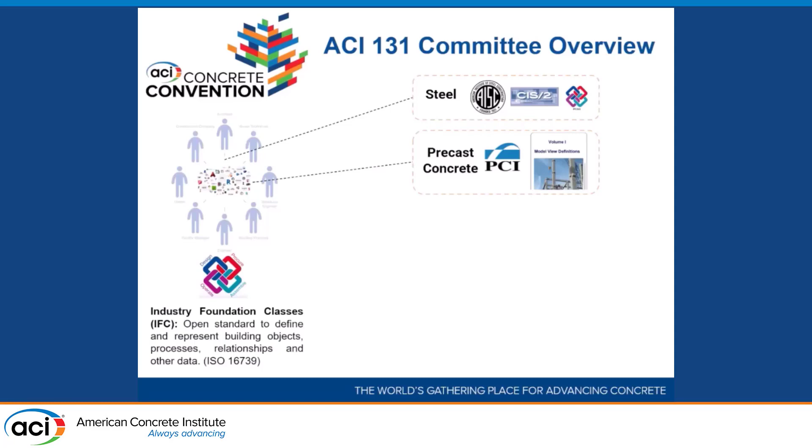The PCI already developed them, with help from Georgia Tech and the Charles Pankow Foundation. But if you think about precast, it's also parts that you put together and then join, right? So it's already broken into pieces.

The problem with concrete is first the supply chain. It's a little bit more interesting because you not only have the typical stakeholders, then you talk about concrete, you talk about rebar, concrete, finish, temporary structures, formwork, scaffolding. So how do you coordinate all these people? How do you make all these people talk?

And more challenging than that is the monolithic versus object-oriented nature of the model. If you think about steel, if you think about precast, a beam is a beam, a column is a column, and there are parts that you put together.

In concrete, cast-in-place concrete, there are several views that you have. The physical model, which you would call a frame, but then the detailer finishes an object here and starts the next there. But the structural engineer says, no, actually there's no boundary, it's just a node. And then the contractor says, no, but I built it this way, so I split it here and I split it here. So now you have different people looking at the same building differently, and they've got to be consistent. So cast-in-place is inherently a little bit more challenging than the other materials.

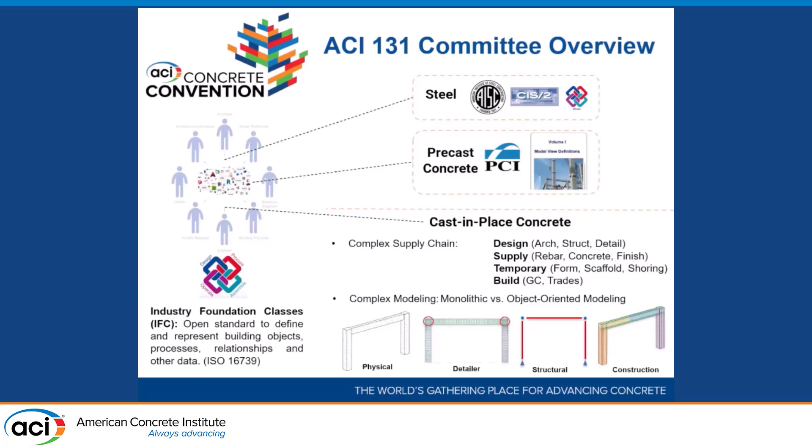For BIM purposes, for modeling purposes. So going back a little bit to that IFC side, IFC is a standard readily available. You can export it, you can import it in the tools you have. The problem is IFC is pretty flexible, and that's an advantage and a challenge. Because if I tell you apple and you don't know what an apple is, you don't know how to process that. So I can tell you beam, and a beam has top and bottom reinforcement, but the program, unless it understands that I'm saying number 3 at 20, if you're not capable of reading that, it's a challenge. So you need to standardize that.

So the National BIM Standard proposed a path to try to further define what needs to be defined when you are looking at a specific industry. So the typical path is, first you look at the whole industry and you say, okay, how many people do you have? What do they do? What tasks do they perform? And how do they exchange data? What model goes to whom? From the architect to the structural to the detailer, and so on.

Once you have that, you take every exchange and say, okay, what do you need from me? What do I need to give you? This is the data that we need, and this is the way we're going to express it. This is what I mean when I say top, middle, and bottom bar in a beam. This is what I mean when I say this, when I say that. So that's a specific view of the model that we are exchanging. That's called a model view definition. And finally, we test it, we model it, we validate it. So that's what we have done, a little bit of what we are doing, and what we're testing. So we're kind of following this general guideline. So that's what the committee does. That's our goal. That's what we're after.

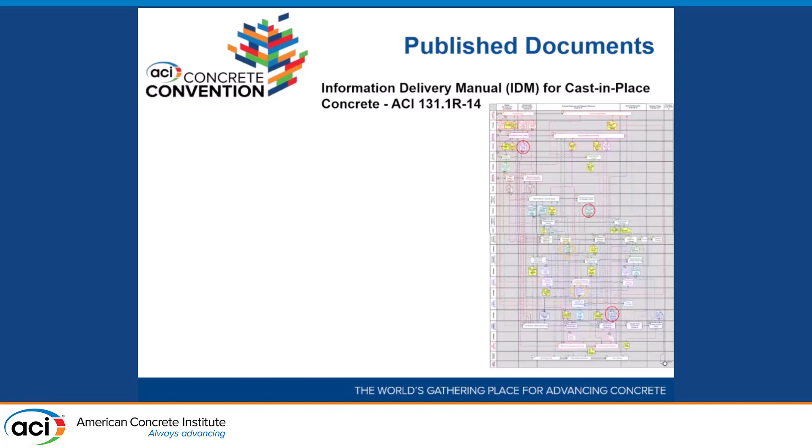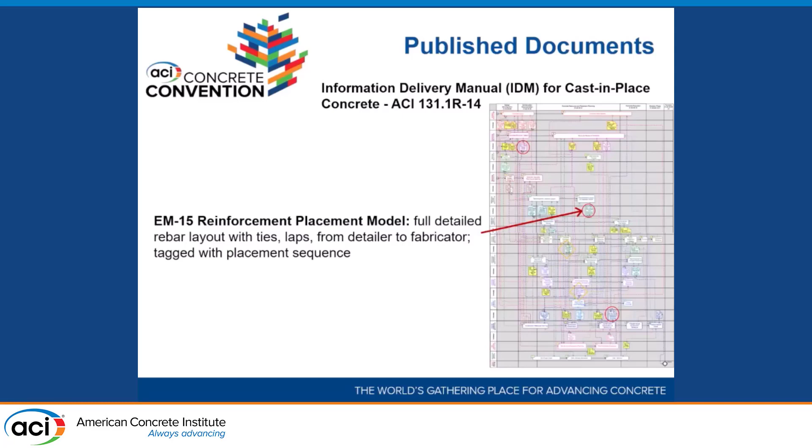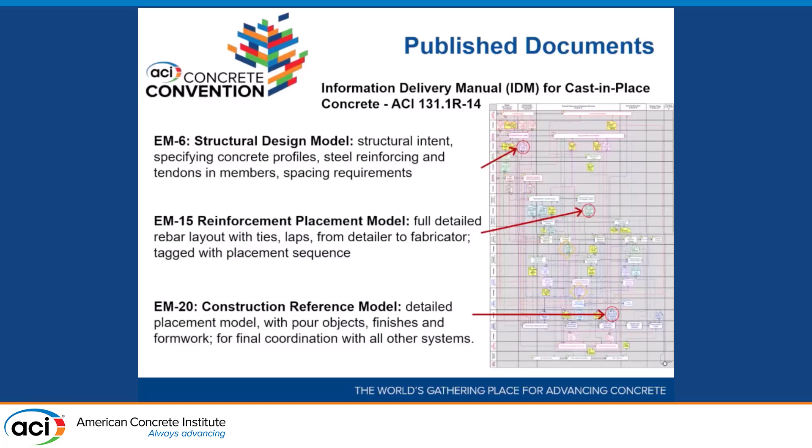Now, the first exchange, and this is already a published document, I'll talk about it in a minute, is the reinforcement placement model. So this is the actual detailed rebar. How do you export it? What properties do you export? What do you mean by the properties? So you can actually find it in a couple modeling tools to be able to export this exchange. And it was very important because rebar is kind of an important component of concrete. The other 2 exchanges, these are the ongoing developments, are the structural design model, which is the design intent from the structural engineer to the detailer or the contractor, and the construction reference model, which comes from the general contractor to the engineer, to the coordination, to the trade. So that's what we are working on.

The next document that we published is that EM15, which is called ACI 131.2R, in 2017, which is the first BIM data exchange for the concrete industry. So we have the IDM, and then we took the first one, and that's published, and it deals with rebar. So if you look into the document, you'll see bar information about mark, size, geometry, surface, bar. So all the data that you might need to describe and specify rebar in a 3D model. So this provides you a standard way of communicating it. So if you follow the standard on export and follow it on import, everyone's going to be able to read the data effectively.

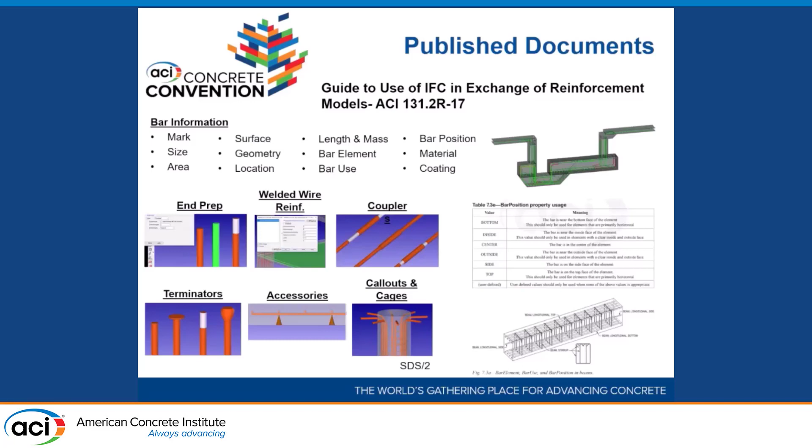And beyond the bar, it deals with end preparations, welded wire reinforcement, couplers, terminators, accessories, callouts, pretty much everything there. So if you go to the document, you will see some images and you'll see all these specifications on agreeing on what we mean when we say something about the rebar. So that's the first one that we have published, the first actual exchange along with the IDM.

And finally, there's a recent tech note that tries to help us agree on what we mean by the level of development, meaning how detailed a model is when we talk about the model itself. It typically goes from 100 to 500 when you're designing, and then operations go beyond. But if I say LOD 400 for concrete, what do I mean for the concrete, for the rebar, for the formwork, for everything around? So that's the third document that is published, trying to make us agree on the language as well.

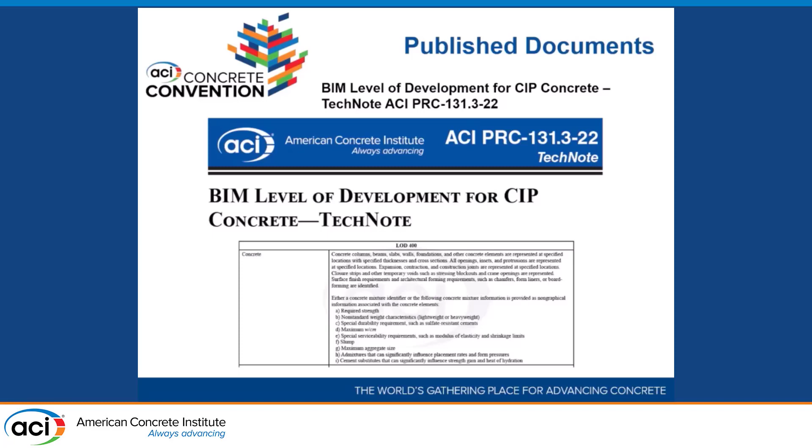So now that that's done, we have 2 more exchanges that we're actively working on, and one update to the EM15, the rebar. So for the rebar exchange, we've been working with the PTI, the Post-Tensioning Institute, to add the post-tensioning reinforcement to the exchange. The exchange didn't account for that when it was published. So we've been working on it.

It's actually been, I think, fully validated for now. So it should be ready for discussion and publication soon to account for this very important component of concrete structures as well. So more properties on or agreements on that specification.

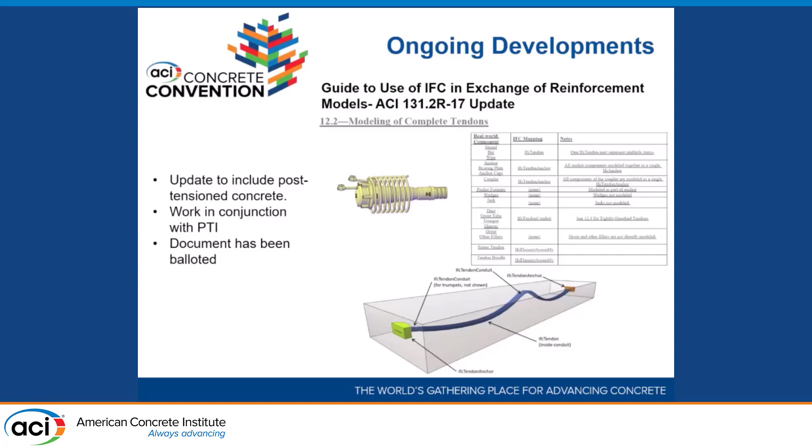The 2 other ones, and I'm going to spend a little bit more time on these ones. The first one is the structural design. So the design intent coming from the structural engineer to the detailer to everyone around. So it deals with the main concrete elements, but this is typically what you would see on structural drawings or structural plans. Details, schedules, trying to specify the rebar sections, where bars are, what you would see coming out of an engineering office to the detailer or to the contractor, right?

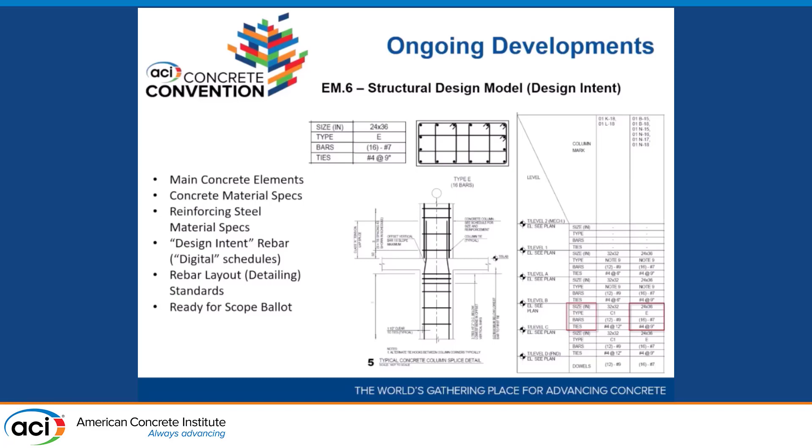The thing is, if you think about it, most firms right now would model in Revit, export it to 2D, send it to the detailer. Best case, you also export a spreadsheet, and then they have to re-import it and work from scratch. So why don't we just attach this in a standard way that we all agree on to our model and bring it along, right? So that's what this exchange is about, taking all the main elements, beams, columns, walls, slabs, and defining what is the typical data that we transfer on the schedule, that we communicate.

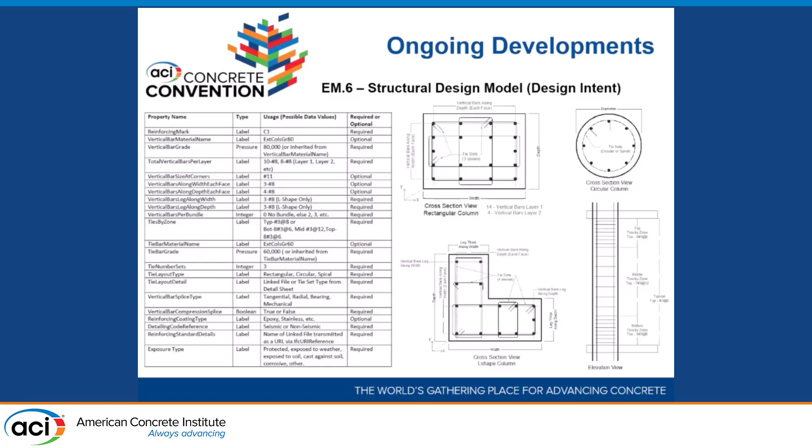Typical, I mean it's concrete. You're always going to find an exception. But on what we can most agree on, how do you communicate that? So what do we mean by tie by zone, spacing, and how do we write it? How do we specify it so I can export it and import it, and look at further applications, and I'll show you a little bit about the implementation side. So that's the first one that we're working on, getting input from structural engineers, from detailers, from contractors, trying to get a lot of agreement on this.

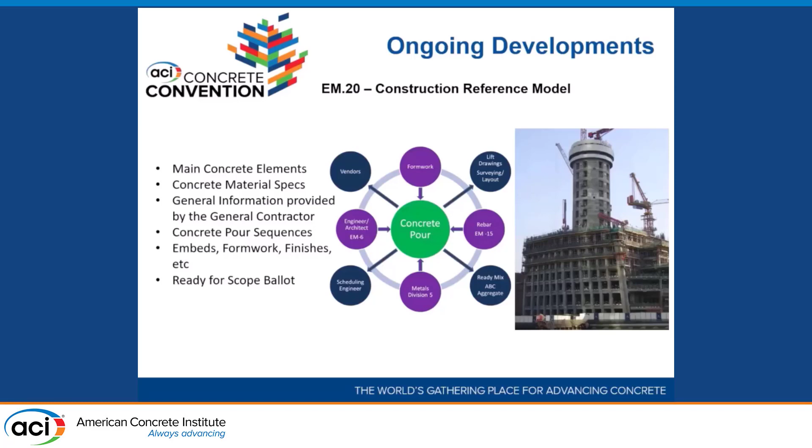The second one is the construction reference model, which comes out of the general contractor with information about the material and the sequencing and planning. So it has formwork, it has embeds, finishes, and you're able to coordinate and deal a little bit with it. So once again, what information do you need for pours, for scheduling?

Challenging in this exchange is the fact that you need to group elements. You're not thinking about one beam, one column. You typically do pours, and those pours group objects. So how do you deal with either a part of an object or a group of objects that you're going to pour together? So that's what we've been working on.

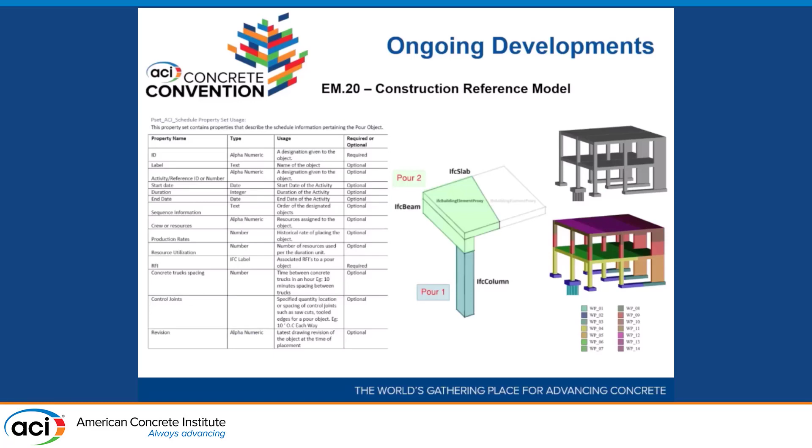Both documents, the EM6 and the EM20, are ready for scope balloting. So we have sort of an agreement on what we're trying to achieve here, and then we're going to start revising the properties and the way we specify this to be able to bring it into publishable documents that hopefully you can use in practice soon. So that's basically a little bit of the work of the committee, what we have done, what we are doing in terms of the BIM standards and the ongoing developments coming out of the ACI.

Now, the additional support that we try to provide from an academic standpoint is how does this affect our practice, and how do we help implement it to show how you can be using this? So it started with an ethnographic study with a method of applied ethnography. We just took a design company and we sort of shadowed a project, a big hospital near Atlanta in Georgia, and then we took a bunch of observations, field observations, interviews, and more importantly, process and exchange observations.

So this is a company that already had BIM processes in place, but without the standards. So how is the data being communicated, being transferred? What is proprietary? What did you have to develop to be able to let these things talk? Because not all companies have the infrastructure to build these exchanges in a proprietary manner.

And from this, we did some coding on the data that we were gathering in terms of all these dimensions for two reasons. First, to be able to map the workflows, and second, to be able to understand the value that it could be providing to the practice, the way it worked.

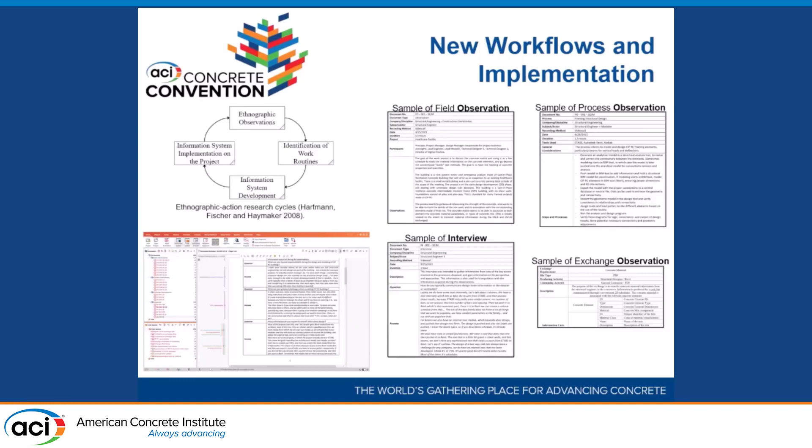So in terms of the workflows, focusing a little bit in the interest of time on these two exchanges, the design intent, we were able to map it, and even within a BIM environment, it can get complicated in terms of moving here. You can start it on the structural realm on the BIM tool, or you can start it on the analysis tool, and then you move it across the different tools that you have.

But then you still gotta export it, define a way to export it to your column design tool, to your beam design tool. If you have a slab or wall design that is probably developed in the office itself, and then you bring it back, and then you bring the data, and then you coordinate it. So even within a BIM environment, it can get a little bit challenging. It's better than 2D, of course, but it still gets a little challenging.

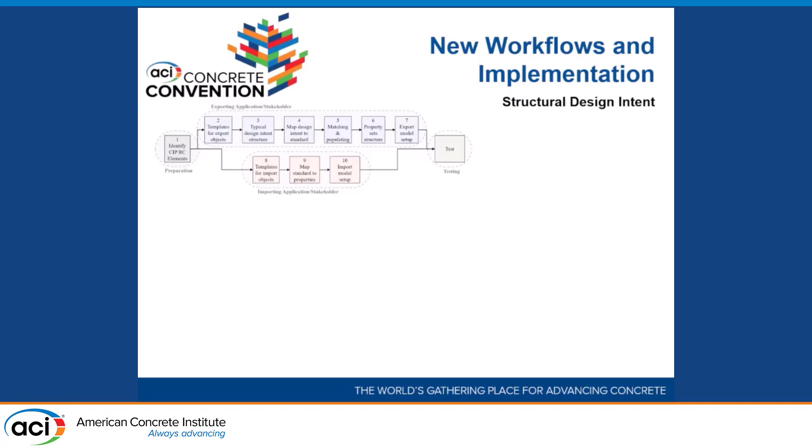So when you bring standards, the process becomes something like this. It doesn't matter anymore who's exporting and who's importing, because it's a standard. All the tools are going to understand what you mean when you export and when you import, because it's written in these standards. So we know what a column is, what the top reinforcement is, what the ties are, how to represent what you would typically do on a schedule. And once you get to that, then how do you implement it?

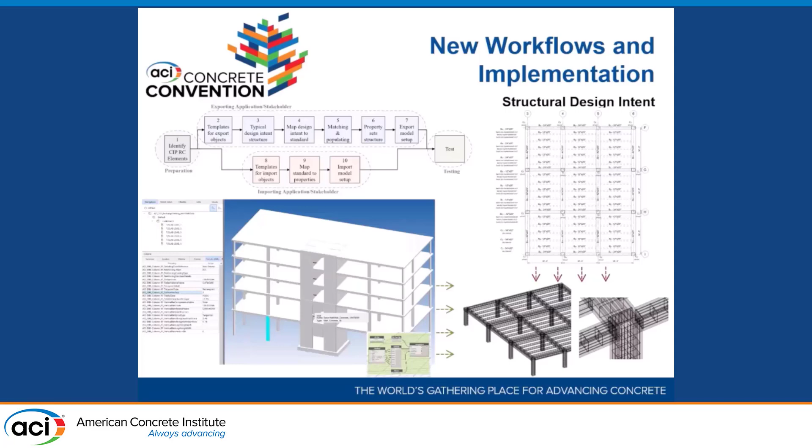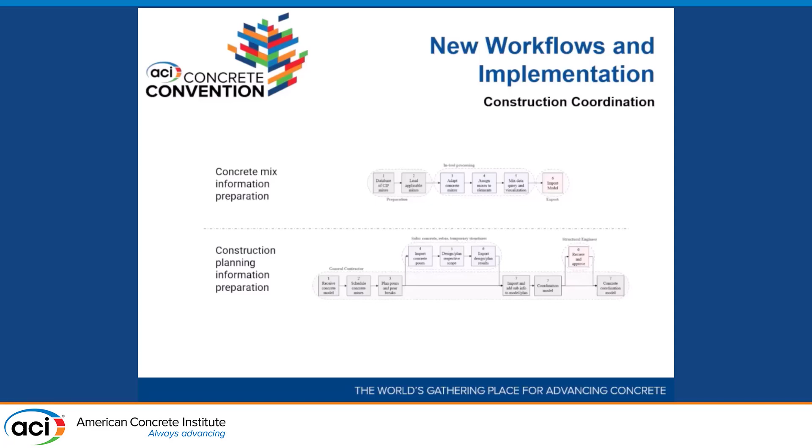The other one is the construction coordination. Same, we're mapping the process, the way it was working, the way they were interacting to coordinate this. And once you bring the standards, or you standardize the way you communicate data, it gets far simpler, because it's tool agnostic and it's process agnostic, because you agree on the task that you're trying to achieve and the language that you're using to deal with this exchange.

So, similar approach: we embedded the properties, we developed codes to populate them. In this one, we had an additional challenge, which was, as I mentioned, dealing with the geometry, parts of geometry, representing it to be able to coordinate and visualize it. So that's why we have two different implementation strategies here. But at the end of the day, you can automate all this. It's just a matter of developing the automation necessary to do the translation, and then you're good.

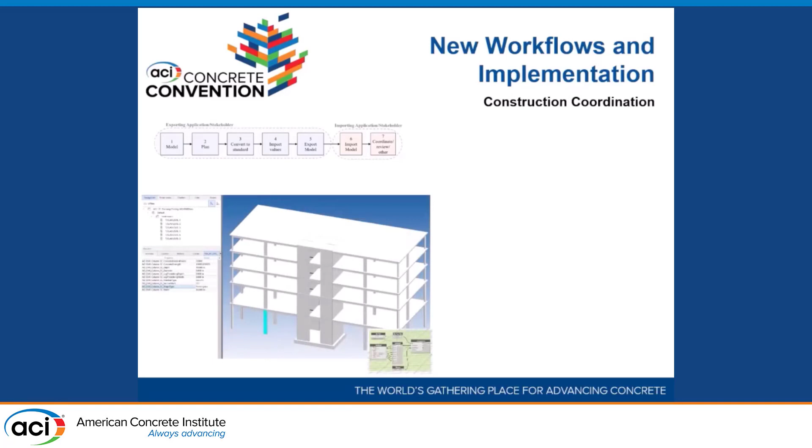So when it comes to it, same thing. Instead of dealing with this, trying to represent the pours, group them, whatever your approach, however advanced it can be, at the end of the day, here, you already have it in the model that you already developed. And the contractor already has the data. So just put it in, and let's make it efficient. For example, for 4D visualization.

You don't have to build it anymore, because you already have the sequencing, you already have the grouping, and you already have the properties. It's just a matter of agreeing what I mean when I say pour date, what I mean when I say pour object, pour group, and then you can actually use the standards to move forward. So this is just an overview of how these workflows start changing our process a little bit, making it far easier. And the question then became, what's the actual value?

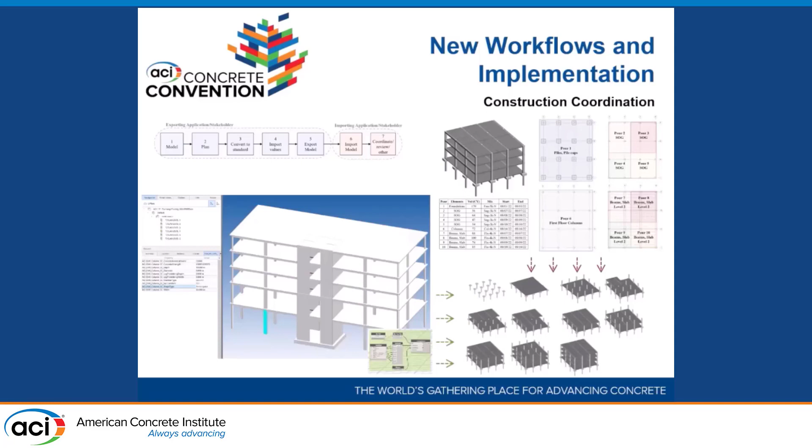Because you can read 200 magazine articles, 300 papers about the advantages of BIM, and they're all right. But how do you actually account for the value or capture that value? So if you go to literature, you're going to find, and this is just the most famous ones for BIM, advantages in cost, reduction on cost, on time, gains in productivity, reduction in RFIs, change orders, errors and omissions. So pick your poison. That's a general overview of the advantages of BIM.

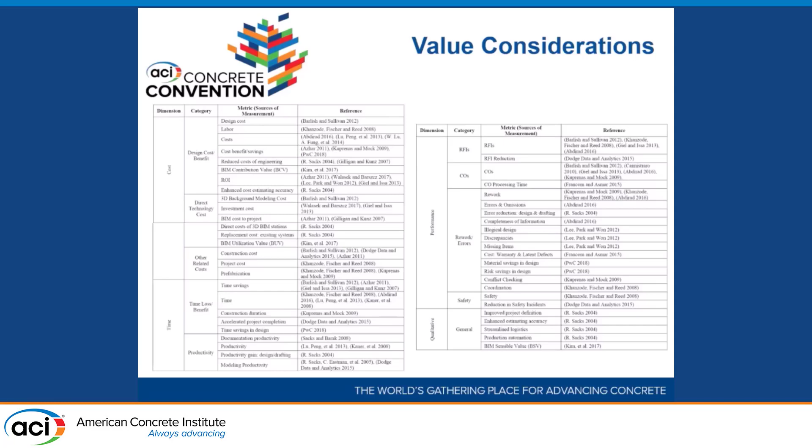Now the question became, what is the advantage of using a standard in our BIM process? Because the advantages of BIM are understood, are clear. So that's what the ethnographic study that we started with allows us to do, because now we had the process, we had the new proposition on implementation methods, and then we had what it could look like. So we repeated the process with a couple more modelers and validated with practicing engineers and people from the industry. And at the end of the day, we found 5 dimensions, and they can be intuitive, but we needed to find a way to derive it from what we were working on.

So the first one, implementation time, that's the quote-unquote cost that you would think, because you need to be able to implement this either in practice or in software and then adapt to it. But that's a one-time thing. You do it once, you establish the mapping once, and then on every project there's the information production time, which is undeniable, because you don't need to produce 2D schedules or 2D coordination plans. You're actually carrying the data on the 3D.

You have reinforcement detailing time, because then you actually are receiving the data, and detailing is just because of the exchange that we're doing. You could look at this from the formwork perspective, from the scaffolding perspective, from the coordination of temporary structures perspective. All of it can be derived automatically from the model that you're working with. Construction coordination time.

This is one of the most important, and we couldn't measure it, because measuring errors and omissions, surprise, surprise, a company doesn't like telling you what they're doing wrong, so we couldn't go there. But it's undeniable that if you are taking a 2D and trying to bring it into a detailing tool, either manually or parsing data and mapping it, you're prone to error. Whereas if it's carried by the tool itself from the moment you specify and design it, bringing the design intent from the engineer, the data is there. So you are way less prone to errors and omissions, and you're improving your productivity in terms of detailing, coordination, and production.

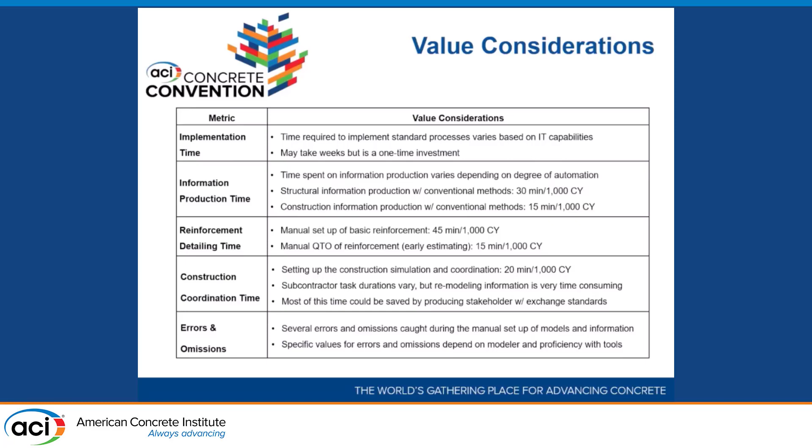So that's pretty much what I had in terms of what the committee has done, what we're doing, and what we're trying to achieve in terms of how we bring it to practice. We're always welcoming people who want to chip in on the way we're approaching the standard, the data that we're trying to communicate, because the more professionals that we have involved, the more capable we are of representing the data from different companies and stakeholders and so on.